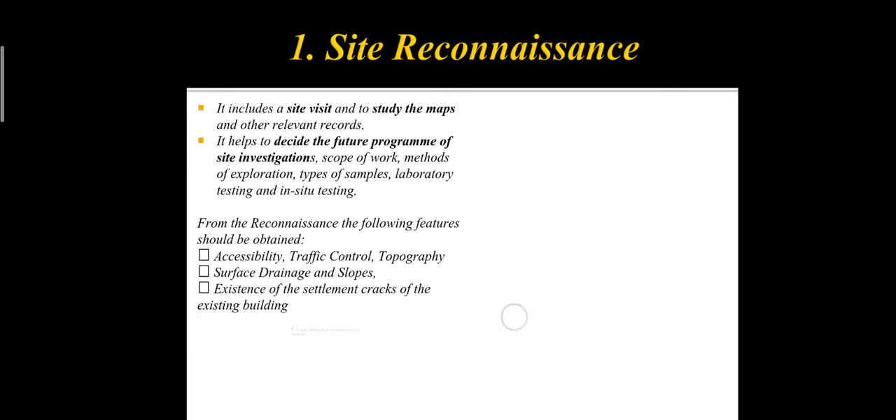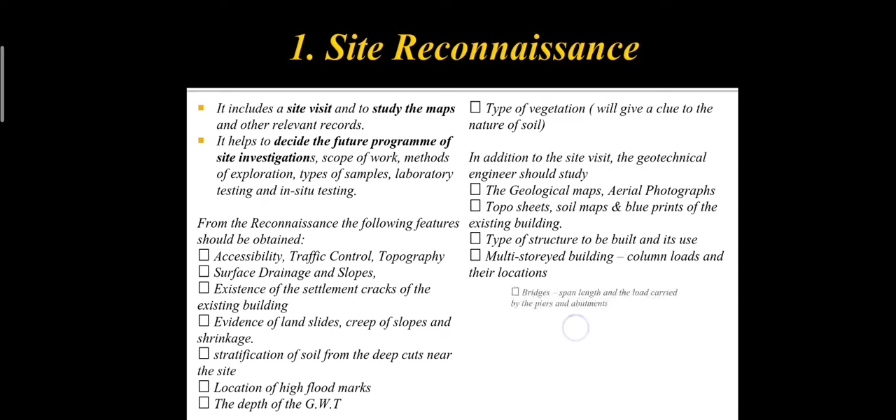So in site reconnaissance, we have seen all these things in the last class. We are going to study the overview of a land, like map study, drainage, traffic, topography, past flood levels, groundwater table. You're going to study all these details.

The second stage is preliminary exploration. In preliminary exploration, we will decide where we are going to put a borehole, where we are going to put a test pit, how many boreholes we are going to put, and how we are going to collect information below the ground level. So the method we are going to use to explore the subsurface is the main aim of preliminary exploration.

We will get an idea about where the groundwater table is, where the rock stratum is, and what soil profile is present in the ground. We are going to learn about this, and especially what method we are going to choose, since there are different methods to know details about a subsurface.

For example, as I said, foundation and soil, all of subsurface investigation is very similar to a human body. To test a human body, we either collect blood samples and test it to understand the disease, or sometimes we take scans like MRI scan, CT scan - different scans are available. In CT scans, MRI scans and all, we don't have to put a syringe or hurt our body to get information about what is wrong. We just have to take a photograph, like an x-ray or CT scan.

They'll be passing rays into our human body, and those rays will detect what is wrong in our human body, and it will show in the reports. So CT scan reports or MRI scan reports or x-rays will show what is wrong with the human body without drilling our body or without cutting our body.

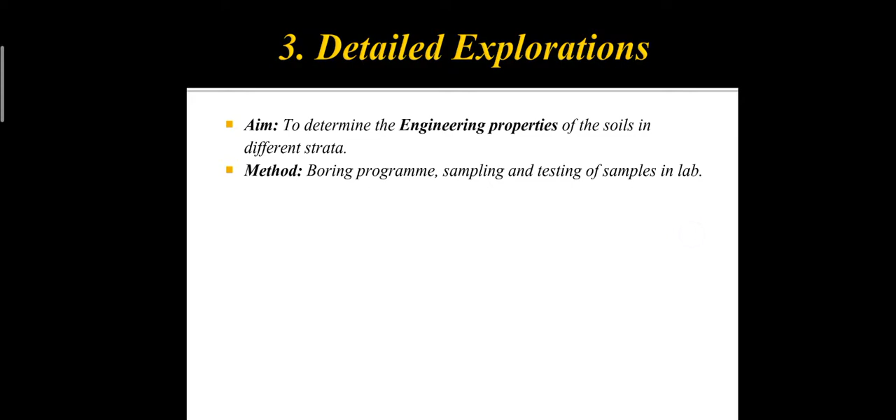So this is what we will be having. And for multi-story buildings, dam projects, huge projects, we must explore the soil, otherwise our project will be a very terrible failure. So we must test the soil. Okay, so that is about the stages of exploration. Basically three types: one is reconnaissance, second is preliminary exploration, and third is detailed exploration.

Okay, next is depth of exploration. What is the depth of exploration? Indian standards, IS codes, are available for how we are going to explore the subsurface. When you take a subsurface, I actually said we should always explore till the rock stratum. We should always drill into the ground till we find the rock below the ground level.

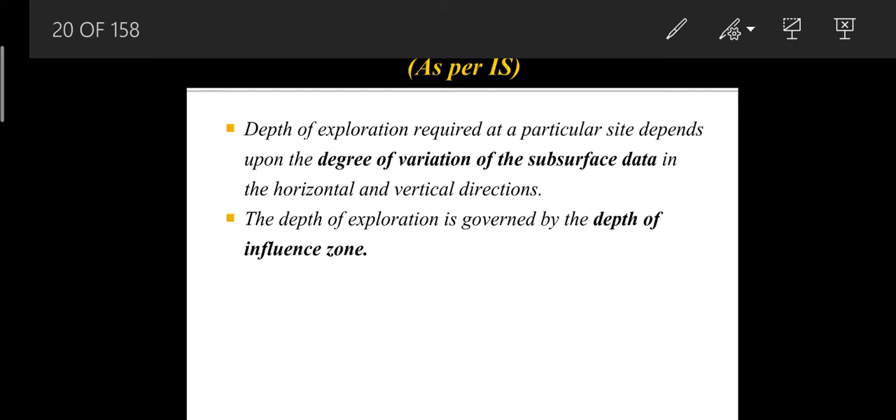So it is always needed, but in some cases it is not needed. For example, if it is only a G+1 building project, then it is actually not needed. There are some criteria to choose the depth of exploration. We are going to construct on that site. We can't put n number of boreholes, and we cannot test the whole land or excavate the whole land to understand what is present below. So how much land you should excavate, what should be the depth of exploration, there is a thumb rule for it. The depth of exploration should be equal to the depth of the influence zone.

What is depth of influence zone? You might have learned about the pressure bulb. How will you get a pressure bulb?

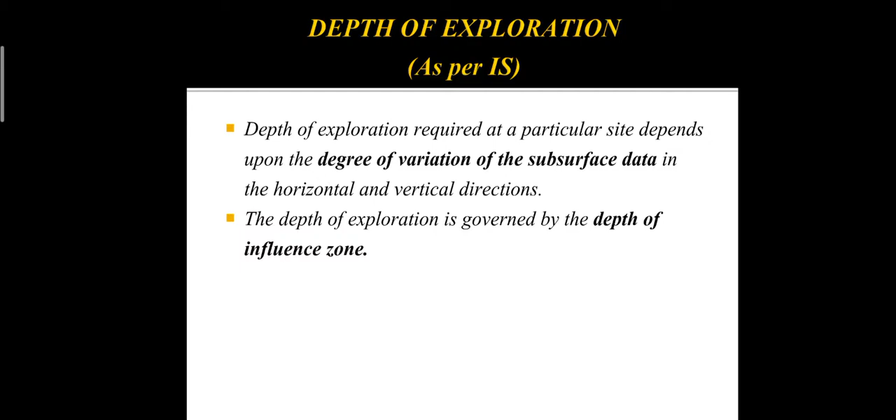Similarly, the load from the superstructure that is taken by the foundation will be transferred to the soil, and that influence will be present, that effect will be present for a particular region. That is called influence zone. So always up to that depth of influence zone we should excavate the soil. It actually depends on what is the type of the superstructure.

For G+1, its influence will be different. If it is a G+2 building, its influence will be different. If it is a concrete building, that influence will be different. If it is a steel structure, that influence will be different. If it is a timber structure, that influence will be different. So it depends on the type of loading or type of the structure, also how much load it is going to carry. If it is a public building, crowd is going to be there, so that influence will be different.

If it is a school or college building, students' walking load, live loads will be there, so that load is different. In a residential building, 4 people will be there, so that kind of load will be different. So it depends upon the type of structure, how much load it is going to carry, and what is the type of soil present. Clay soil, silty soil and sand have different properties. So all these will have an influence on the depth of exploration or depth of influence zone.

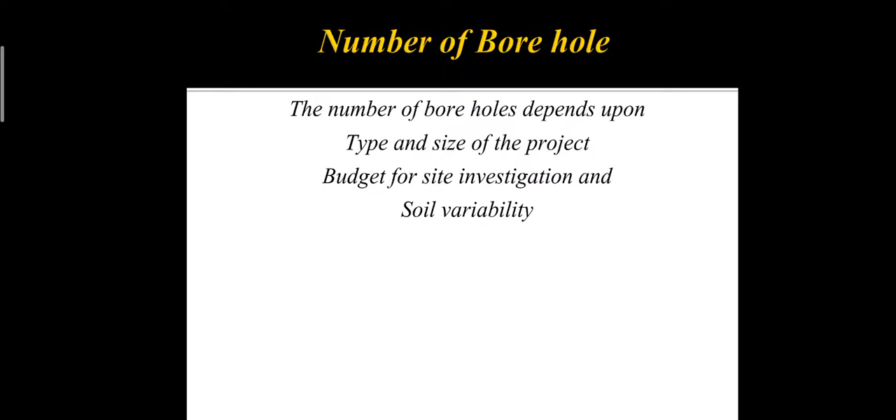So for that purpose we should always fix how many boreholes we are going to drill on the ground. As you all know, it depends on the project, it depends on your budget, also it depends on the soil.

Okay. It is always said that for most residential buildings only one borehole is enough. And where should the borehole be put? If it is a small building or a residential building, with G plus 2 or G plus 3, only one borehole is enough. And where should we drill the borehole?

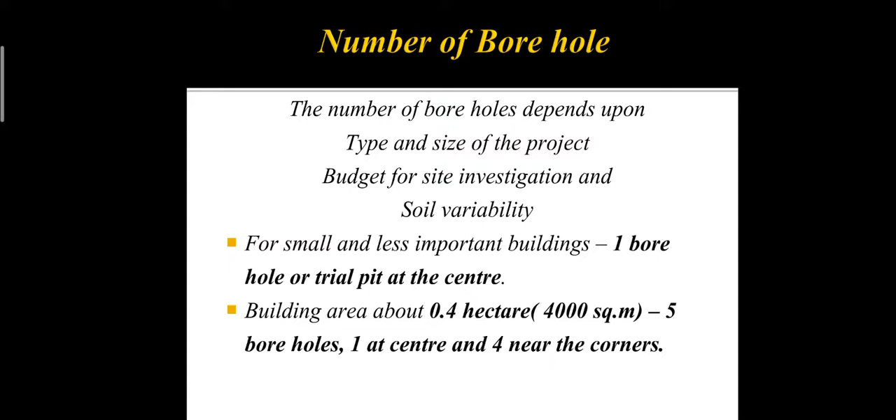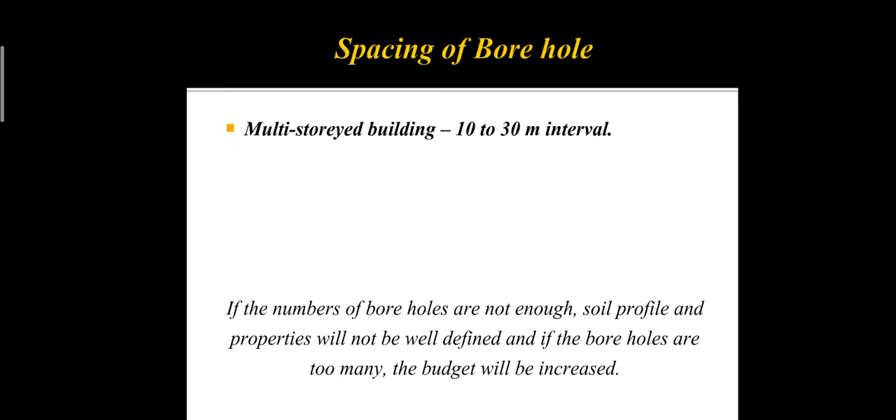If I said 5 boreholes, okay, what's the spacing between the boreholes? Minimum how much should be the spacing between the boreholes? If it is for a multi-story building, at every 10 to 30 meter interval we should have one borehole.

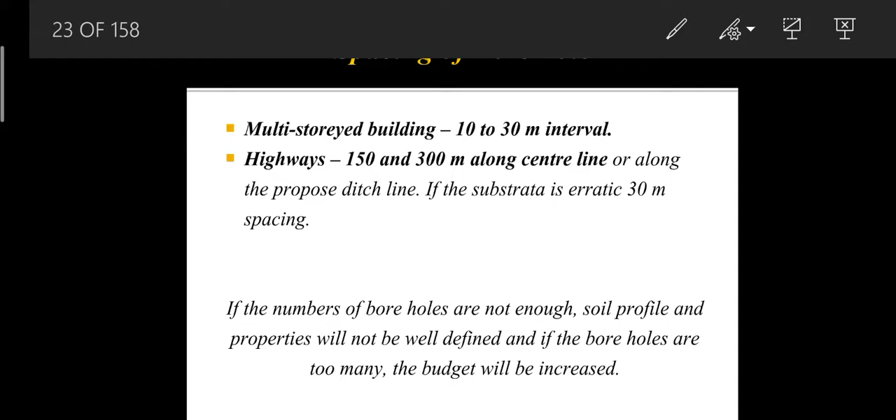If it is a highway, road project or railway project, then the boreholes are drilled at every 150 meter or 300 meters. If it is a dam project, then we should be putting them at minimum 40 meter, maximum 80 meter, or approximately every 50 meter.

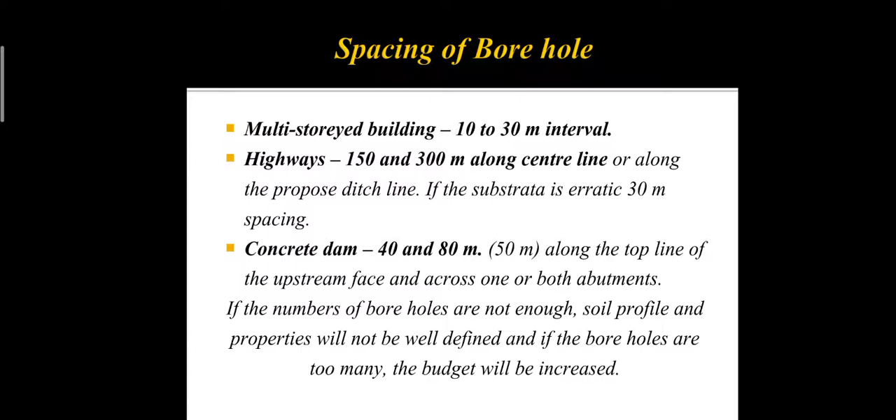We should also look into our budget and the complexity of the site. That should also be taken care of. If it is a multi-story building, there are some thumb rules: for G+1, at least 3.5 meter we should excavate, or know what soil is present within 3.5 meter, because the foundation will be within 3.5 meter for a G+1.

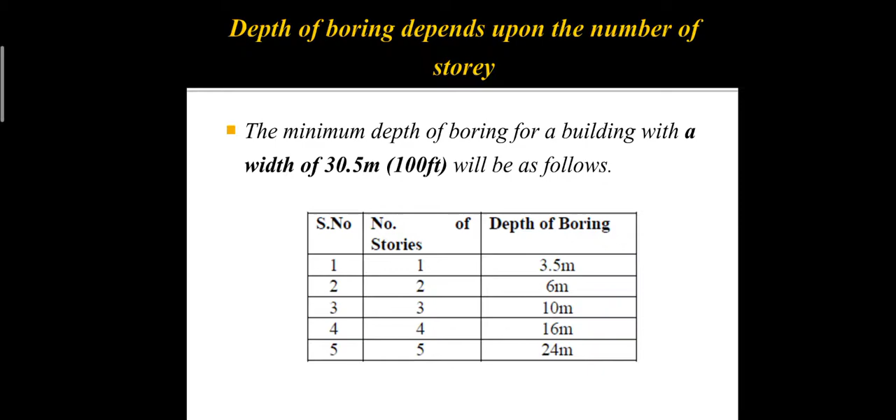If it is a G+2 building, then at least 6 meter it should be bored. If it is a 3-story building, we should go for 10 meter drilling into the ground. For 4 stories, we go for 16 meter drilling. If it is a 5-story, we go 24 meter into the ground. Okay, so this is